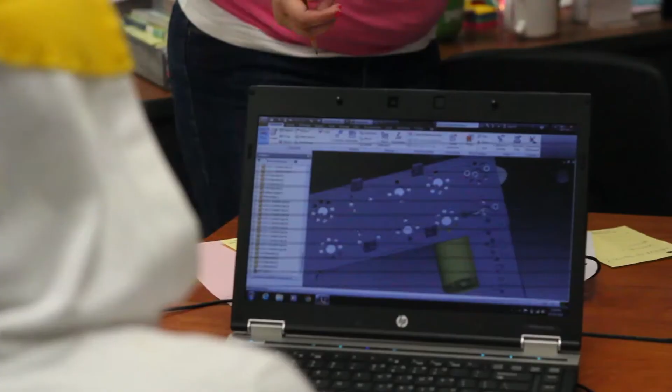This was the first year the team had used CAD? At the beginning of the school year, we originally had a different design that we used. So this is basically a general design. This is the flag raiser, the DC motor, and that's sort of our little hand thing, I guess. Battery component.

When deciding on designs, the whole team gets together for a meeting and listens to each other's ideas. Once we've decided on an idea, we break up into smaller groups and work up from there.

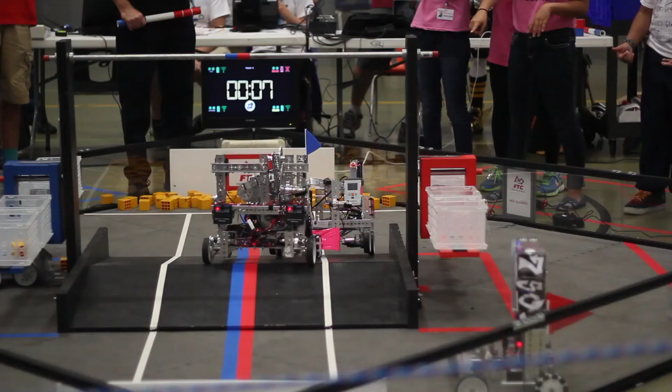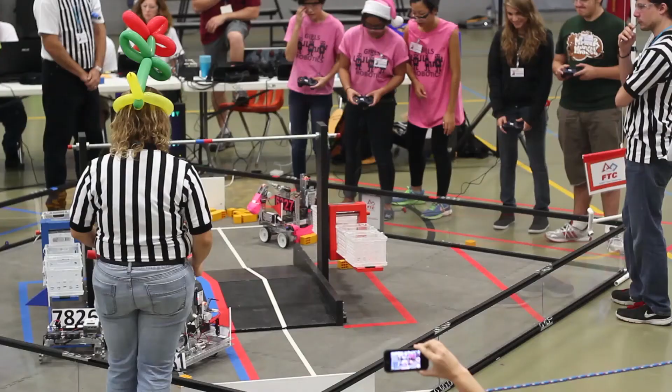At our first meet, it was my first time as a driver coach, and so we just planned to do the autonomous mode because we were still making final adjustments on our arm. What we planned was to have a block in and then score into one of the pendulum baskets and then park onto the ramp. And since we didn't have an arm during teleop, we just pushed the box underneath the pendulum to score and to stabilize.

Then for our end game, this was actually the most stressful time for me as a driver coach, to alert the drivers that we only had like 30 seconds to raise the flag. And so that's what we did, and we raised it to the top every time, except that one time.

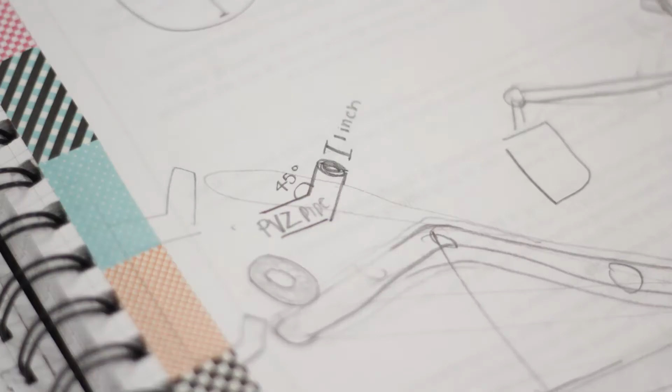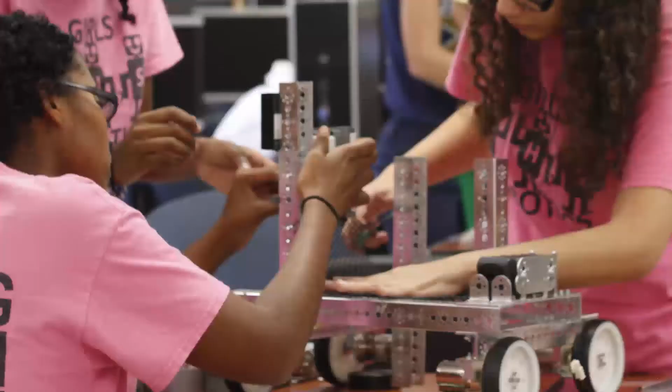For our robot's design, we used a plastic mesh instead of a steel plate to hold all of our robot's wires, so it'd be lighter and faster during the matches. We also used 4 wheels with 4 drive motors to increase our power to climb onto the ramp during autonomous. Our flag raiser was powered by a motor because we realized early on that the servos weren't strong enough to raise the flag. And our cup used to score during the autonomous mode was made out of Legos and pink duct tape because it was the most efficient way to score.

We've kept a close eye on our budget this year through our sponsors, and we raise money by having spirit nights at multiple restaurants in our area. And we do a lot of team building. We go to pizza nights and we go to basketball games. And while we're there, we outreach and we tell people what we do.

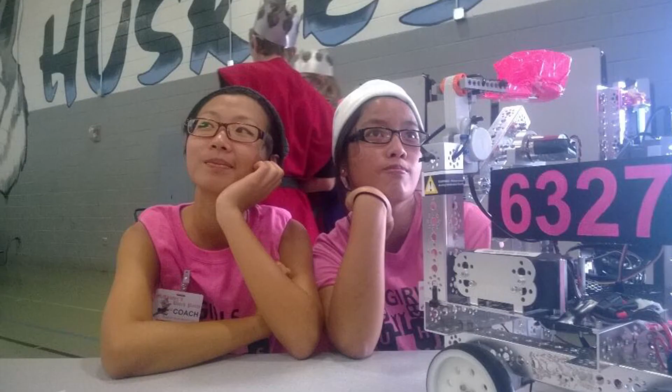To make our robot more festive and bright, we've added pink duct tape to parts of our robot and have our team mascot from last year, Regina George, sitting on top of our robot. We've also painted our number plates a bright pink for added visibility. To communicate through our team, we use email and social media sites such as Facebook and Twitter.